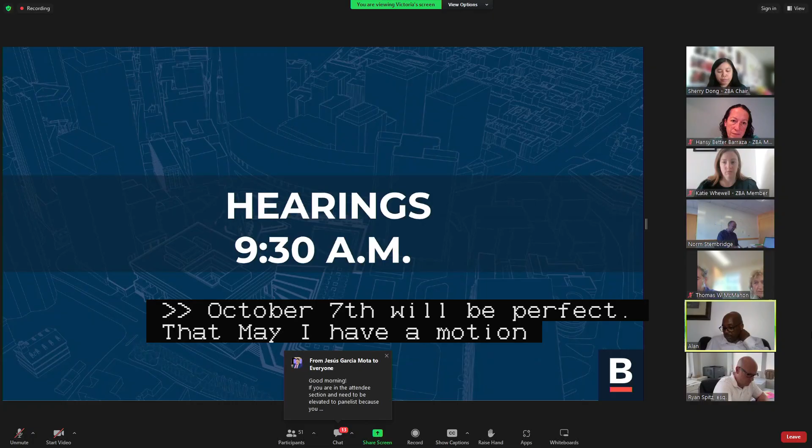We could do October 7th or October 28th. October 7th will be perfect. With that, may I have a motion? A motion to grant the deferral till October the 7th. Is there a second? Second. Mr. Stembridge? Yes. Ms. Whewell? Yes. Mr. Langham? Yes. Ms. Better Barraza? Yes. Chair votes yes, motion carries. See you then. Thank you.

Are there any further requests for withdrawals or deferrals for the 9:30 hearing?

Yes, good morning, I have a request for withdrawal on 2 cases. Good morning, Madam Chair, members of the board. Luis Santana, HS Construction Consulting Services. Address is 46 and 48 Fayette Street.

So those two are, the first is case BOA 1737368 with the address of 46 Fayette Street. Also, we have case BOA 1737366 with the address of 48 Fayette Street.

Would you please explain to the board what you're requesting? As indicated in the letter that we submitted to the board, the owner, after extensive community outreach, decided not to continue with the cases and with the addition. We will only be performing interior renovations to the building in the near future.

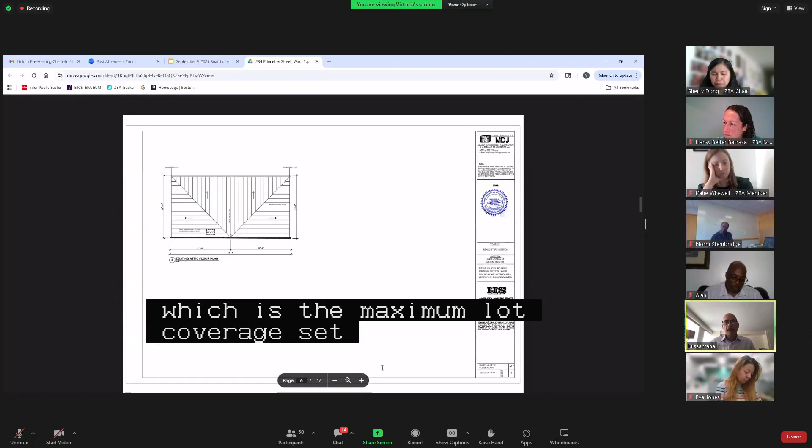We have one zoning violation, which is the maximum lot coverage set at 60% in that particular area, and we will be exceeding that by about 20%, or 256 square feet. All other zoning parameters are in compliance, including all the setbacks. One of the parameters, the minimum permeable area, is existing non-conforming, and we will be increasing that by removing the existing concrete rear yard.

Those were the existing plans. If you move forward, those are the existing elevations. This addition in the rear is not visible from the public way whatsoever. As you can see, the first floor from that elevation is not affected. We are just doing the second and third.

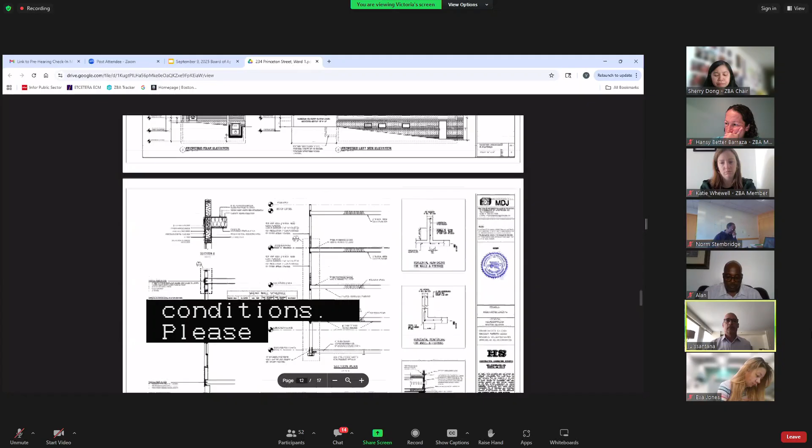If you can please move over to the floor plans, proposed conditions. So again, the second floor unit consists of one single bedroom. We will be adding a bedroom at the rear with a bathroom. The third floor has 2 bedrooms presently; it will become a 3-bedroom unit.

The first floor unit, which has 1 bedroom, will become a 3-bedroom unit by adding 2 additional bedrooms in the basement. We will be relocating some utilities, and we will comply with all the means of egress required for the bedrooms on the lower level. With that, I conclude my presentation. If you have any questions, I will be happy to answer them.

Thank you. Are there questions from the board? Hearing none, may I have public testimony?

Hello, Madam Chair, members of the board, my name is Eva Jones, representing the Mayor's Office of Neighborhood Services. Regarding 234 Princeton Street, our office defers to the board's judgment on this matter. A community process was conducted, including an abutters meeting held on May 12th of this year that was very lightly attended by community members, and no feedback or concerns were expressed. The applicant was connected with the Eagle Hill Neighborhood Association, and they are in communication. At this time, the Mayor's Office of Neighborhood Services defers to the board's judgment on this matter. Thank you for your time and consideration, everyone.

Madam Chair, there are no additional comments. Okay, with that, may I have a motion?

Motion Chair, to approve. Is there a second? Barraza, second. Mr. Stembridge, yes. Ms. Whewell, yes. Mr. Langham, yes. Ms. Better Barraza, yes. Chair votes yes, the motion carries. Good luck. Thank you.

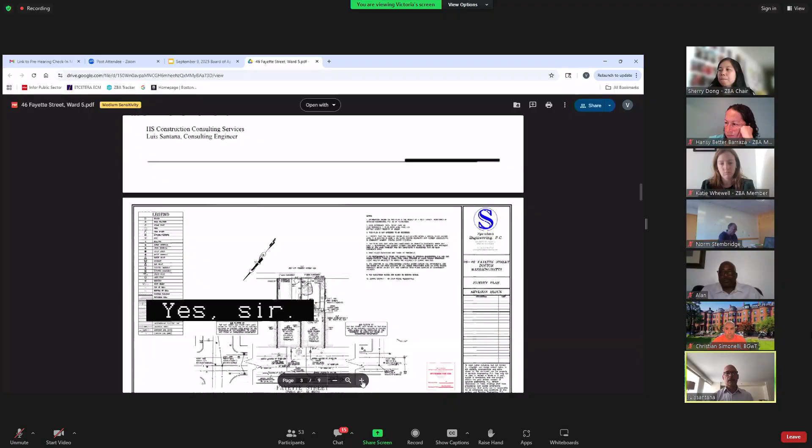Thank you. The applicant and or their representative present, will they please explain to the board? Yes, good morning. This is the case that I previously indicated we will be withdrawing, and the board just had a motion to approve the GCOD only and extract all the other variances from this request. I will be happy to elaborate on both of them.

We do have the no harm letter and Boston Water and Sewer approval for the GCOD component of this case. Mr. Simonelli, can you confirm? Yes, Madam Chair. Good morning, members of the board. Christian Simonelli, Boston Groundwater Trust. We have both Boston Water and Sewer approval letters and no harm letters for 46 and 48 Fayette Street.

Great, thank you. Thank you. So if there is any public testimony, please limit it to GCOD. We are only addressing GCOD at this time. Is there anyone who'd like to speak?

Madam Chair, we have two hands raised. The first one is Chris Godou, please. You can proceed. Chris, can you? Yeah, hello, can you hear me?

Yes. I am the abutter at 50 Fayette Street, and my question about this GCOD is that we have a problem with the groundwater infiltration system that was designed, and I had hired an attorney and an arborist to discuss whether or not that was a problem. When they withdrew this appeal, there was no indication this would be an issue that was going to be raised. So I would ask for a continuance so that if there's something my attorney thinks is improper and is going to harm the tree in our backyard, I'd like to have further discussion about that. Thank you.

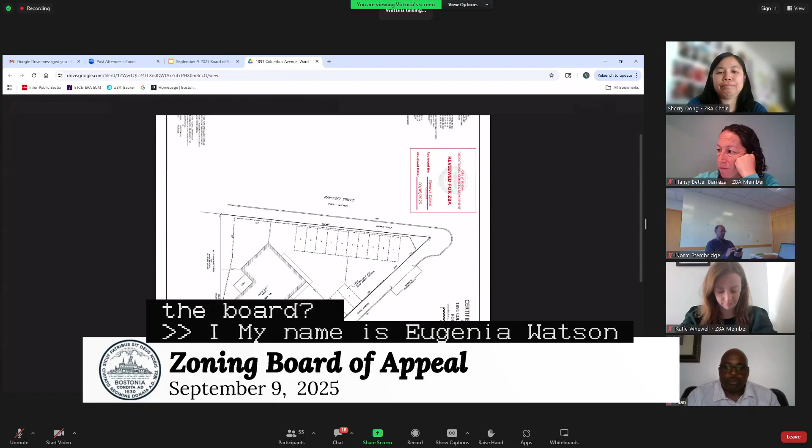Hi, my name is Eugenia Watson. I'm not sure of the protocol, so good morning, Madam Chair and all the other dignitaries. I literally abut 1891 Columbus Ave.

There, ma'am, we're not on that case right now. Oh, okay, that's why I was confused. Thank you. Oh, sorry, we're not on the comments right now. So is the applicant available?

Is the applicant present? I don't see anyone for IAO Auto Repair. No, I don't see anyone on behalf. Okay, we're gonna keep going then.

Norm, you're on mute. Bear with us, we're having some technical difficulties on this end. No. Okay.

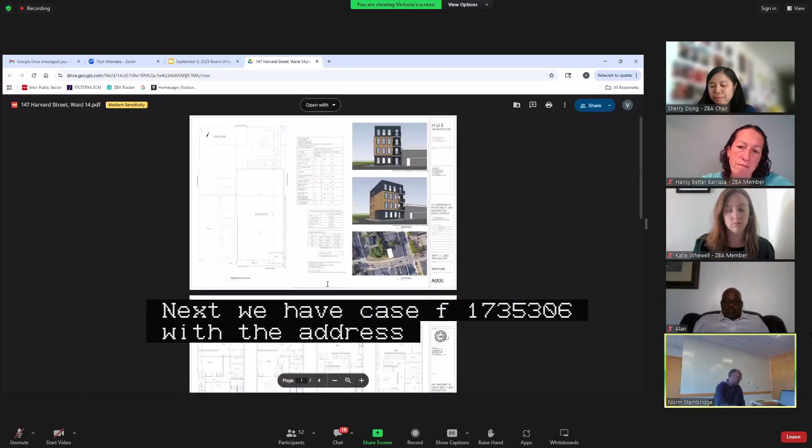Next we have case BOA 1735306, with the address of 147 Harvard Street. If the applicant or their representative for this case is present, would they please explain to the board?

Hi. Michael and Jerome, I don't know if you're for this case. Good morning, sorry about that. Are you for 147 Harvard Street? Yes, my name is Michael Van Dam.

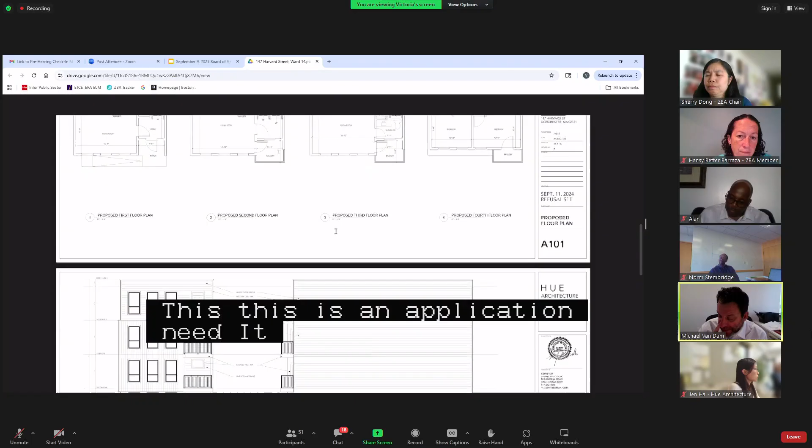I am an attorney for the applicant, and I'm here, but I'll pass the torch to Jennifer Ha, who's the architect on this application. But I will start out before handing it over to her. This application needs to go to the ZBA based on some Article 65, Section 9 issues with lot area and other things, front and setback and height that are stated in the letter on May 8th. So I'll turn it over to Ms. Ha.

Hello, Madam Chair and the board. My name is Jennifer Ha, principal architect at Hue Architecture, located at 53H Harvard Street in Dorchester. I'm actually just down the street from this project I'll be presenting tonight, which is 147 Harvard Street. If you go to the first page, this is a locus map of the site showing that the project is a 5-minute walk from Fairmount Commuter Rail, Talbot Ave Station.

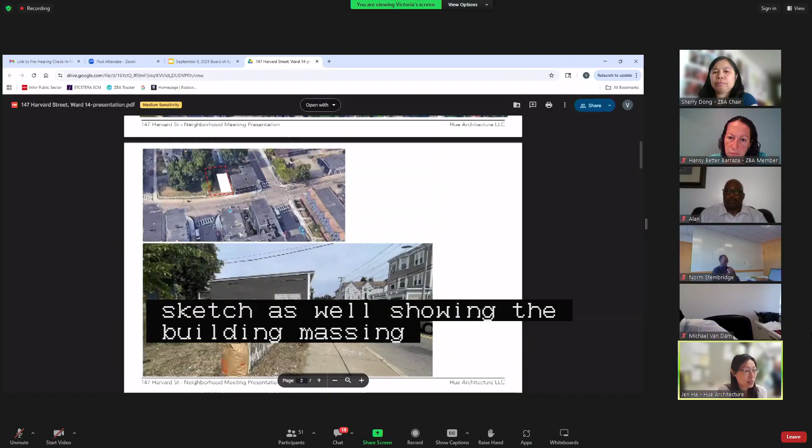On the next page, we have an aerial sketch showing the building massing, which fits in scale compared to the neighboring buildings.

The site is 3,565 square feet, measuring around 47 feet by 75 feet. It is a 3F-5000 zone. It abuts a church to the east, a vacant city lot to the west, and a 3-family to its rear. Across the street are some triple deckers and commercial mixed-use buildings.

The proposal is to build a new 4-unit dwelling with 4 on-grade parking spaces. The building is 4 stories with large windows and balconies facing Harvard Street. Here is the proposed driveway, with 2 parking spaces along the side of the building and 2 in the rear. The next page is a certified plot plan done by the surveyor. We don't anticipate needing to remove any existing trees on the lot for the project.

On the next page are the variances we are asking for. I think Michael can walk through these, but let's go to the design first.

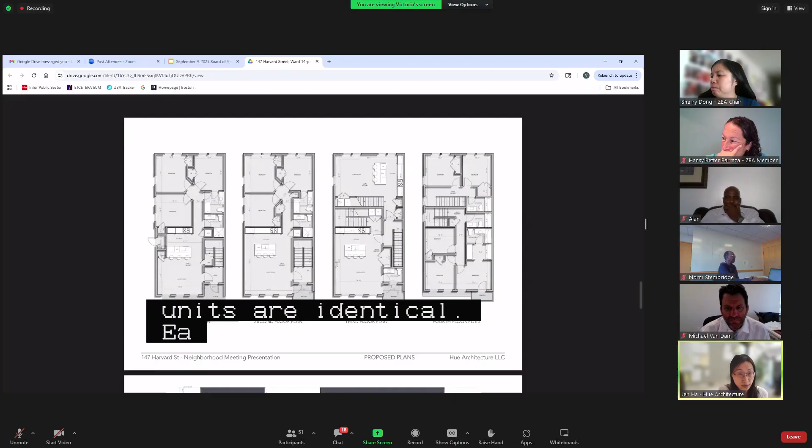Page 9, okay yes. The first floor and second floor units are identical. Each unit will host 3 bedrooms and 2 bathrooms and an open kitchen, dining, living space. The third and fourth floors will host bi-level units, one unit with 2 bedrooms and 1 bathroom, and the other with 3 bedrooms and 2.5 bathrooms. There is no proposed basement for the project. The 3-bedroom units range from 1,000 to 1,200 square feet, and the 2-bedroom unit is 914 square feet.

The facade is a modern design with a combination of dark gray and wood tones. We are specifying wood painted polyash siding along with gray Hardie lap siding and painted steel balcony railings.

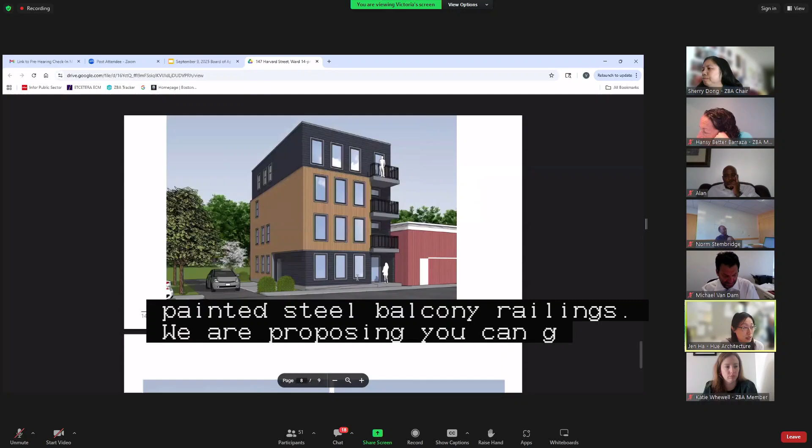We are proposing landscaping and plantings in the front and side of the building to buffer the parking. We designed private front balconies for 3 of the 4 units facing Harvard Street. We think the beautiful large windows facing Harvard Street offer an attractive and desirable neighborhood appeal towards the commercial street. That is the end of the presentation.

Thank you. Are there any questions from the board? Hearing none, may I have public testimony?

Madam Chair and members of the board, for the record, my name is Jeremy Bembury, the Dorchester Community Engagement Specialist for the Office of Neighborhood Services. The applicant has completed the community process, which consisted of an abutters meeting facilitated on July 8th, where one abutter voiced concerns regarding the proposed height of the project, while others' inquiries were addressed. Following the abutters meeting, no further community process was required, and to date our office has not received any letters of opposition or support. Thank you for your time, and the Mayor's Office of Neighborhood Services would like to defer to the board for their judgment.

Thank you. Madam Chair, there are no additional comments. With that, may I have a motion?

Madam Chair, I'll put forward a motion of approval with BPDA design review to look at the site planning. Is there a second? Second. Mr. Stembridge, Yes. Ms. Whewell, Yes. Mr. Langham, Yes. Ms. Better Barraza, Yes. Chair votes yes, the motion carries.

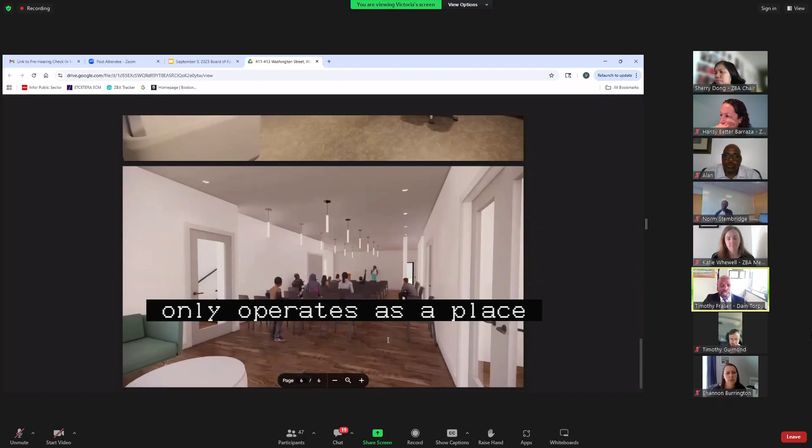This appeal involves property at 411 to 413 Washington Street in Dorchester, in the Four Corners neighborhood. The church has owned this building since 1992, which not only operates as a place of worship but also is the site out of which operates the Ella J. Baker House, a faith-based organization that works with at-risk youth in the community on violence reduction and academic programming.

In 2007, a fire did extensive damage to the building. However, the church continued to provide that youth programming on a reduced basis as conditions allowed in the remaining portion of the building. But now the church is seeking to completely renovate the building into a place of worship and add state-of-the-art elements where they'll continue to operate the mission of the Ella J. Baker House. In addition to the services provided to date, the new building includes a high-tech music studio and a cutting-edge computer center and other modern improvements to attract the youth and continue the work of this organization for the community.

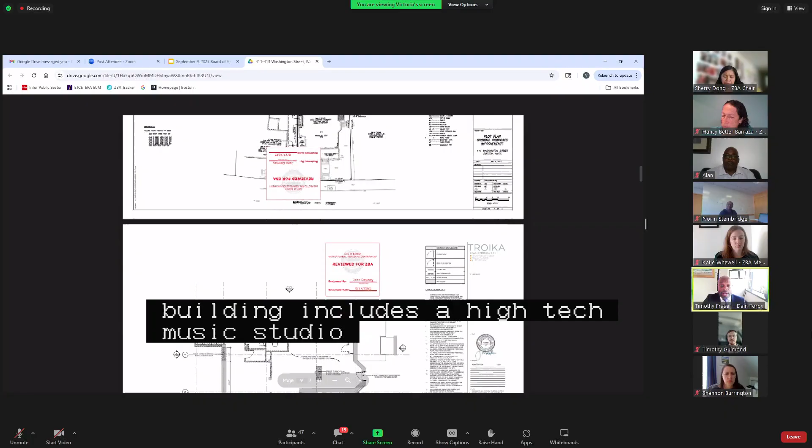The project does give rise to 4 variances. The first is height. We're in a 2F 5,000 zoning district where the maximum height is 2.5 stories. The existing building is 3 stories, and the project doesn't propose to add any additional stories, but we do require a variance for that historical code violation.

There's also a side yard setback violation. The side yard setback is 10 feet. The existing building is already right on the property line, not uncharacteristic for this neighborhood. So our project does require a variance for that historical code violation.

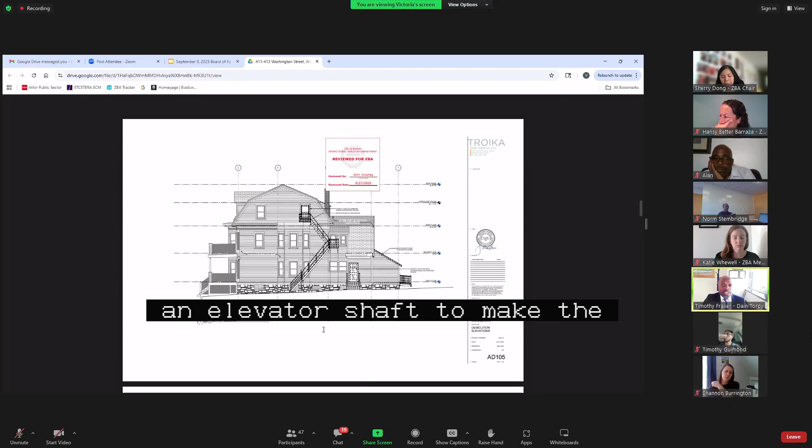With regard to the rear yard setback violation, we're proposing to add, as you can see in that picture on the right, a small addition to accommodate an elevator shaft to make the building ADA compliant, which currently it's not. Looking at the shape of the lot, and there's a plot plan signed here, you'll see that the rear yard violation would be measured from that closest piece to the rear of the building. We have almost 80 feet to the actual rear yard line, but because of the shape of this lot, the rear yard is calculated and we're at 21 feet. We require 30.

And then the next violation, you'll see that there are two parking spaces to the rear of the building. They're two ADA compliant parking spaces, and then there'll be an additional space for a staff member or on Sunday the pastor.

That rear lot is actually accessed by way of an easement on the next door property, and that's what triggers that violation. The easement is deeded and perpetual, but we do need a variance to approve the continued use of that easement to access those two parking spaces in the rear.

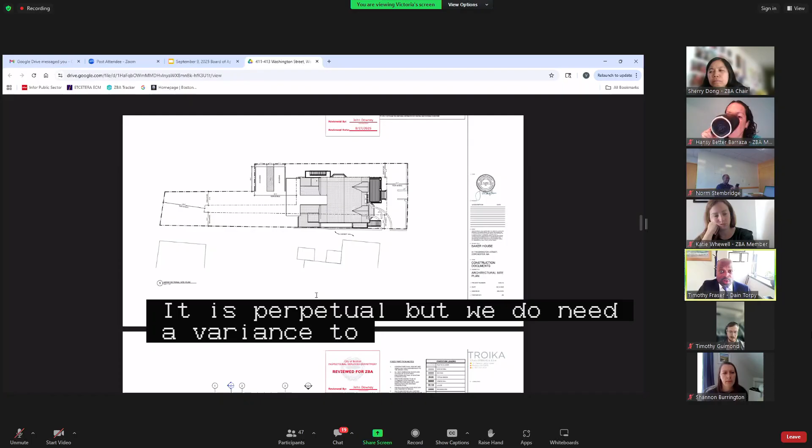And then finally, there's an FAR violation again, which is not uncharacteristic for a project of this type in this neighborhood. The applicant conducted a robust community process in conjunction with the Mayor's Office of Neighborhood Services to communicate the project to the community and other stakeholders.

Specifically, in April 2023, we presented the project to the Greater Chamberlain Neighborhood Association, and I believe there's a support letter on file from Greater Chamberlain. And then in May, we held an abutters meeting as well as met with the United Neighborhood Association, and I believe there's a letter of support on file from United Neighborhood Association as well.

The Office of Neighborhood Services then determined that those meetings sufficed as the required community engagement. So we're here today before the board to request that the aforementioned variances be granted. That concludes my presentation, but I want to make Shannon Burrington of Studio Troika available to answer any questions about the project design and technical specifications.

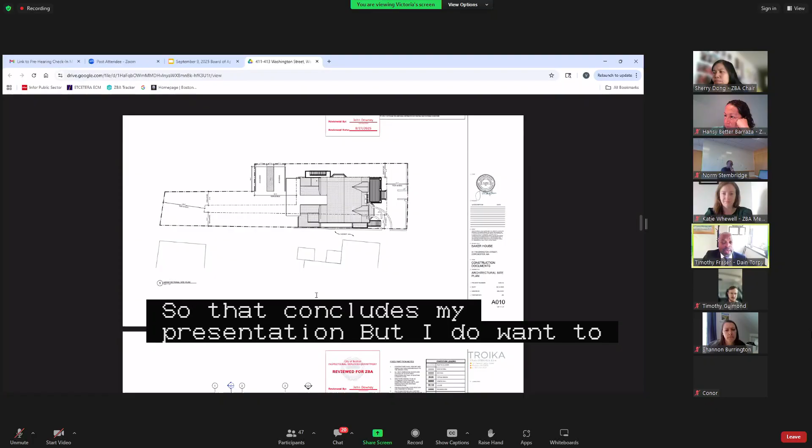And as I stated, Dr. Rivers is also on the line to answer any questions about the programming or services provided. So with that, I will take questions from the board. Thank you. Are there questions from the board? Hearing none, may I have public testimony?

Madam Chair and members of the board, for the record, my name is Jeremy Bembury. I am the Dorchester Community Engagement Specialist for the Office of Neighborhood Services. The applicant has completed the community process, which consisted of an abutters meeting facilitated on May 13th with two abutters in attendance. A few inquiries were made regarding the community's ability to use the facility and were addressed during the meeting. No concerns or opposition were raised during the meeting.

Next, the proposal was presented to United Neighbors Association and Greater Chamberlain Neighborhood Association. The proposal was well received by both civics, and with no concern or opposition was approved to move forward. To date, two letters of support were mentioned but were not received by our office at this time, to my knowledge, although they may have been sent directly to the zoning board. Thank you for your time, and the Mayor's Office of Neighborhood Services would like to defer to the board for their judgment.

Mr. Bembury, quick question—just a comment and a question. We did not receive those two letters that were mentioned, but we did receive one from Mount Bowdoin Betterment Association and Four Corners Neighborhood Association. Is that an abutter to this project? I am not aware that those two associations are abutters. I am only aware of the United Neighbors Association and Greater Chamberlain Neighborhood Association. I can take a look to see if they are the required or requested civic.

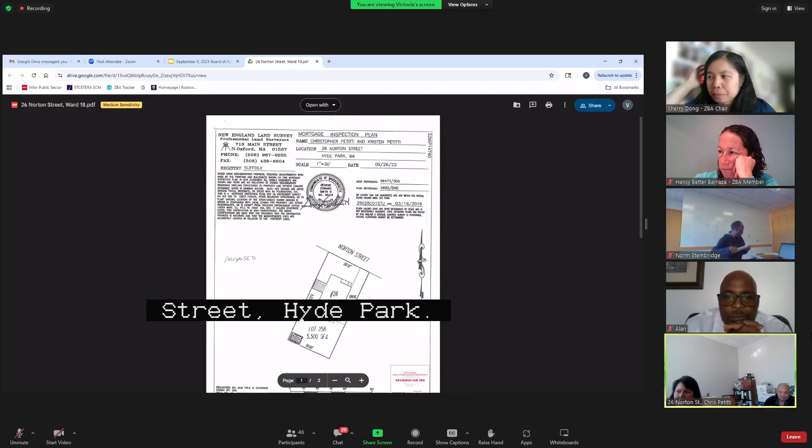Good morning, members of the board. My name is Michelle Bulger. I am here representing Chris Petitti, homeowner of 26 Norton Street, Hyde Park. Mr. Petitti is here with me. Chris purchased his home and pre-existing sheds at 26 Norton in October of 2022. The two sheds on his property appear on his home inspection report. After buying the property, he found that the sheds were built too close to his property line. He has been working with ISD and now seeks consideration from this board. The two sheds are small and are in keeping with his neighborhood.

There is no opposition to his request that we are aware of. Mr. Petitti asks that the board issue a variance with respect to the setback requirements and allow his sheds to stand nearer than 4 feet to his lot line. He is further asking that the board waive the requirement for a certified plot plan and accept the certified New England Land Survey plan and the revised plan provided, which contain his sheds, and allow ISD to use these drawings to have the sheds plotted or added to its property. Should the board allow this request, we will recommend that the civil action filed against him concerning the two sheds in the Boston Housing Court be dismissed, and we will follow through with ISD following this hearing with the board's decision. Thank you for your consideration.

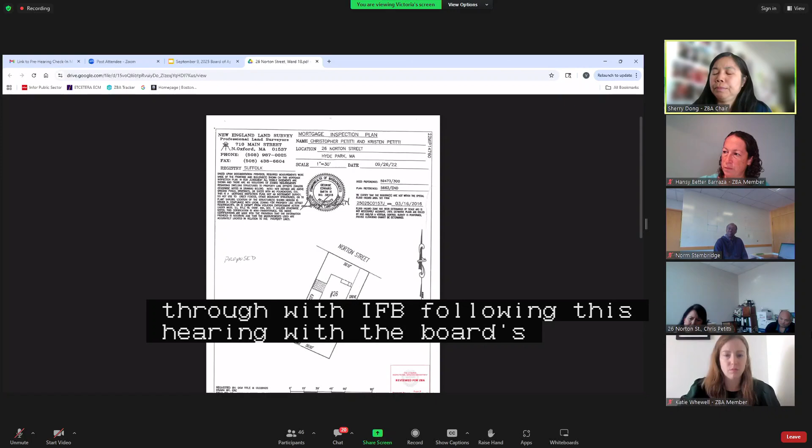Okay, are there questions from the board? I would just ask why they have not engaged a surveyor.

The mortgage inspection plan was certified, and the sheds were easily drawn to the plan, and it would be a financial burden on the homeowner to have another survey, and we would argue unnecessary. It was the cheapest way around. It was a $3,500 survey, which could have been a little bit more than that. So it was looking around $5,000 to have that accomplished. So we were trying to avoid that.

Okay, it's just unclear to me whether we have the authority to waive required documents to allow the land survey plan. I believe we were told at ISD that even ISD has that authority. If the board doesn't have the authority, ISD has the authority. They provided us with a memo granting them that authority to waive that part of it. So I don't think we need that from the board. What they were unable to waive in their planning department was the setback, technically, I think.

Okay, right. Okay, I thought I just heard you say you needed authority from us to waive. I did ask that, so I shouldn't have, because no worries, Mandy's already comfortable with that. Okay, thank you. Any other questions?

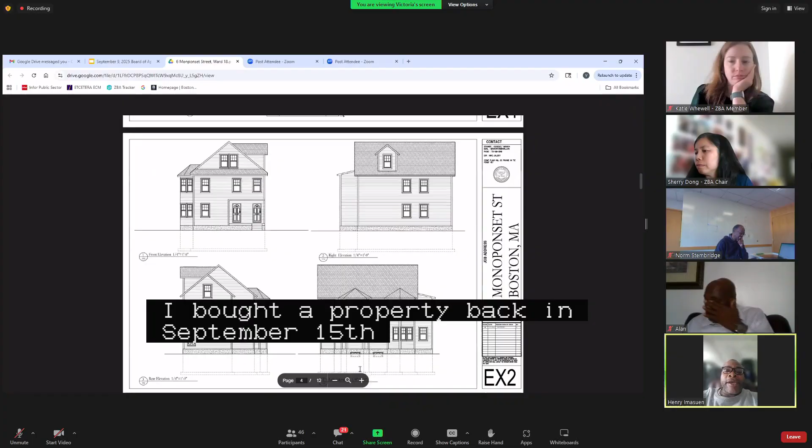Yes, I'm here to present. Good morning, board. My name is Henry Imasuen. I'm the owner of 6 Monoponset Street. I bought the property back on September 15th, 2024. It was sold to me as a 2-family. When I tried to get a permit to renovate it because the property was extensively dilapidated, I noticed the attic was finished like an apartment, and so was the basement. So when I went to get a permit to fix it, I found out that it was actually a 3-family.

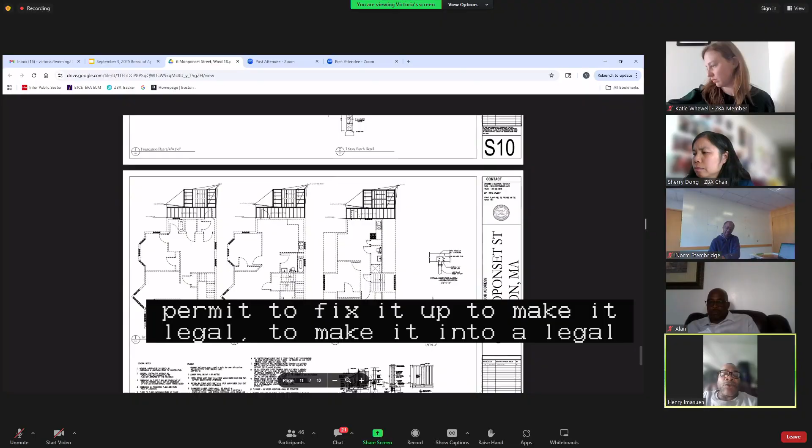It was approved for a 3-family back on March 15th, 1946. Even though it was sold to me as a 2-family, I discovered it was a 3-family. I decided to get a permit to fix it up, to make it legal, to make it into a legal 4-family. The basement was also partially finished. When I applied for the permit, they said because of the setbacks, to make it a 4-family, it was denied, and that I have to go in front of the zoning board.

I have completed a site survey. Boston Survey did the survey. There's a huge garage behind the building that I'm going to be bringing down to create more room for parking, so all the apartments are going to have parking in the backyard and on the side of the building. So that's why I'm here. I already submitted the documents from the architect that redesigned the interior.

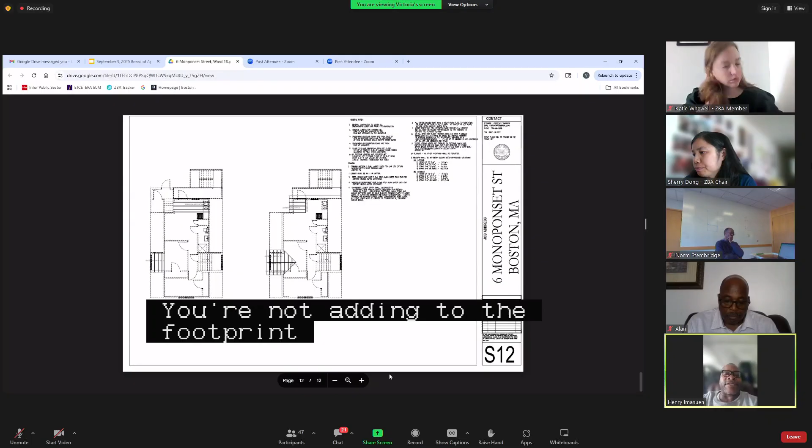So I'm just hoping that you guys approve it for me so I can start my renovation. Thank you. So just to confirm, your renovations are interior only, you're not adding to the footprint? No, I'm not adding to the footprint, but the exterior of the house is extensively dilapidated. I'm going to put the deck, it has to be redone on all floors, and then vinyl siding and the roofing all has to be done. Thank you. Questions from the board?

Hearing none, may I have public testimony? Madam Chair and members of the board, for the record, my name is Jeremy Bembury. I am the Hyde Park Community Engagement Specialist for the Office of Neighborhood Services. The applicant has completed the community process, which consisted of a well-attended abutters meeting held on May 12th, with congestion and parking concerns voiced multiple times. Abutters felt that the already congested neighborhood would be overwhelmed with the additional units and requested they provide off-street parking instead. Other concerns were for the upkeep of the property and whether it would become a rooming house. One abutter did state he would like to not see it become a rooming house in the future. Following the abutters meeting, on June 11th the proposal was presented to Edgewater Neighborhood Association, where they voted neutral on the proposal and approved to move forward. Thank you for your time, and the Mayor's Office of Neighborhood Services would like to defer to the board for their judgment. Thank you, Madam Chair, there are no additional comments.

Okay, any other questions from the board? Hearing none, may I have a motion? Madam Chair, I'd like to put forward a motion of approval.

Is there a second? Second. Mr. Stembridge, yes. Ms. Whewell, yes. Mr. Langham? Mr. Langham? He appears to be frozen. Mr. Langham, if you can hear me, you might want to turn off your video. Okay, Mr. Langham, we need a vote from you. Yes. Thank you. Mr. Stembridge, sorry, Ms. Baraza. Yes. Chair votes yes, the motion carries. Good luck.

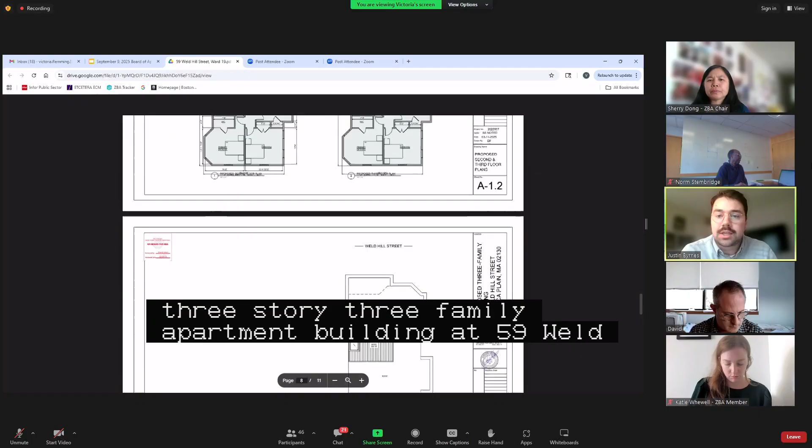Each of the 3 units in this new construction would be a 3-bed, 2-bathroom unit with an average unit size of just under 1,200 square feet. 2 parking spaces would be provided in the rear of the lot for residents. And I also want to add that this would be an owner-occupied building as Mr. Chaitin intends to reside in one of the units.

The proponent sees this as an opportunity to bring additional housing to the area by utilizing an underused and rather overgrown lot. The 3-family use is not only zoning compliant, but well within the context of this area, as over 70% of the structures on the street are 3-family dwellings.

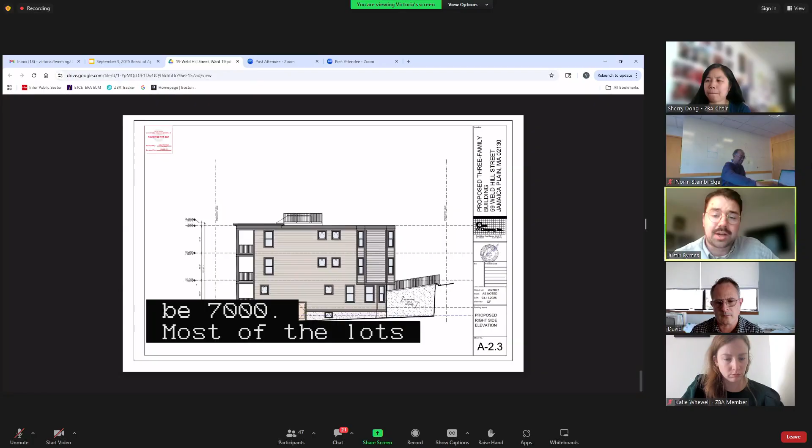Our small lot size, which we see as the root cause for most of our violations, is also within context in the surrounding neighborhood. Though the required lot area for a 3-family in the sub-district would be 7,000 square feet, most of the lots on Weld Hill barely even have half of that amount of lot space. In fact, per our research, all but one of the properties on Weld Hill Street would have an FAR violation if they were to be built as new constructions under the current code. So we feel that despite the number of violations incurred, our proposal is perfectly in line with what exists in the neighborhood. And I would also note that the BPDA recommendation feels the same.

A quick note on our community process. This underwent a full, robust community process with an abutters meeting and a meeting with the JPNC, who I believe filed a letter of support with the board. And with that, I will turn it over to David Freed to quickly run through the plans, and I'm happy to answer any questions afterwards. Thank you.

Thank you very much, Justin. Madam Chair and members of the board, my name is David Freed, and I'm an architect at Chu & Company, address of 1 Billings Road, Quincy, Massachusetts, 02171. If you could go back to the 2 pages to the front elevation, please. I'm sorry, just go back to the plans, to the first floor plan and the second floor plan, A11. Thank you so much.

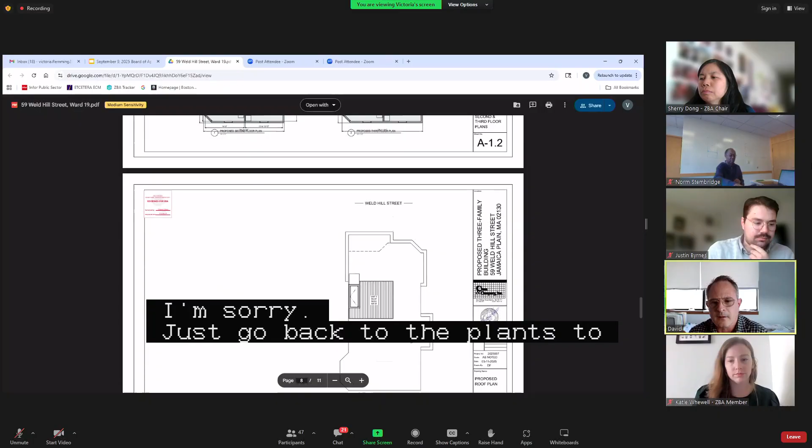Justin already elaborated about the setbacks and our zoning violations. I'll just quickly take you through the plans. We have an owner-occupied 3-family that's 3 bedrooms, 2 baths. We organized the living space so that it fronted the street and the corner, and we set the bedrooms in the back. If we go to the next plan, please. When we go to the second and third floors, the units get a little larger at 1,200 square feet each. And if you could please move it to sheet A21.

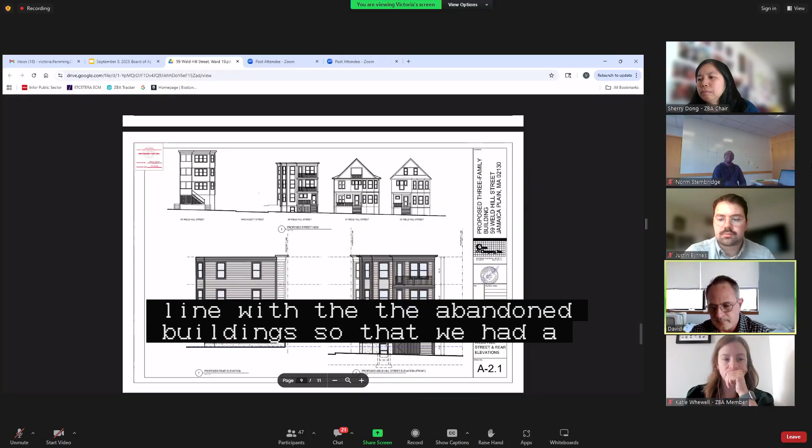We raised the building so that our first floor was in line with the abutting buildings, so that we had the same relationship, and to facilitate handicap access to the first floor unit, as it's a group 1 unit. We have a lift that is incorporated into the first floor deck.

Because this is a building that's on a corner, we tried to address the other front on Wachusett as a front rather than as a side. We also conceived of this as a three-family with a flat roof, so as to bookend Wachusett on each end, as there's an existing three-family on the opposite side of Wachusett.

This is the side elevation as seen from the abutting house number 57, and we have a small rear yard. We'll have a couple of parking spaces.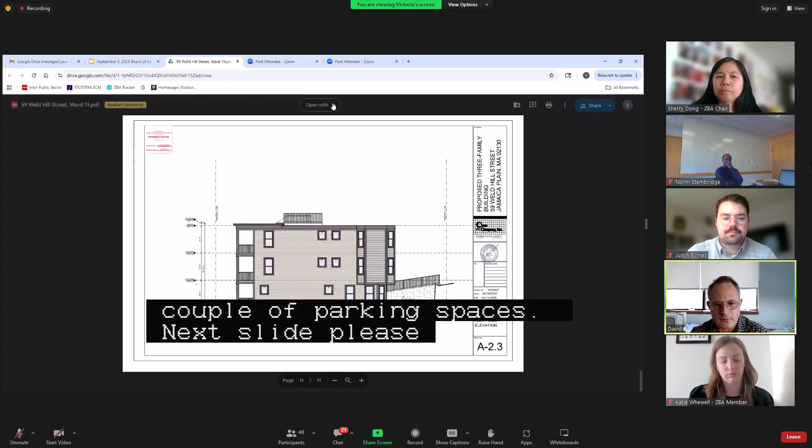And that may be the end of the presentation. Thank you. Are there questions from the board? I have one question.

I have one question regarding the Google Images. I see this really beautiful, large oak tree, but I'm not seeing that on your survey plot plan. Is that oak tree on your property?

Yes, the oak tree. Sorry, David, if you want to speak. I was just going to ask them to call up the plot plan. I think it is shown on the plot plan. Yeah, I believe so as well. Yeah, you can go back to see. Yes, it's on our property. Can you zoom in on that, showing me where it is? Okay, but it's showing it as if it's built into the garage. It's growing out of the garage and the retaining wall. Okay.

It looks like a very large, healthy tree from the image. Are you going to be removing that tree?

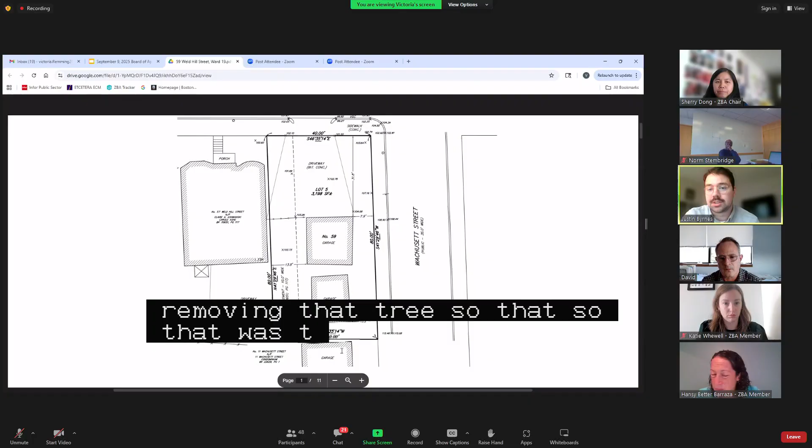So that was the initial plan, and the community raised similar concerns about the oak tree. Many members on Weld Hill Street have a great appreciation for the tree, and so does the proponent. We are more than happy to work with BPDA design review, should we be approved, to look for solutions to maintain the tree. As David said, it's currently growing into one of those garage structures in the rear, and its roots have grown through the wall and it's sort of leaning on it for support. But we're more than happy to explore options through design review to try to keep it, because we have heard extensively the community's wanting to preserve the tree. So we definitely are open to any solutions to try to keep it.

Okay, that sounds good. Just because these trees around these neighborhoods are over 100 years old, so sounds good. Thank you.

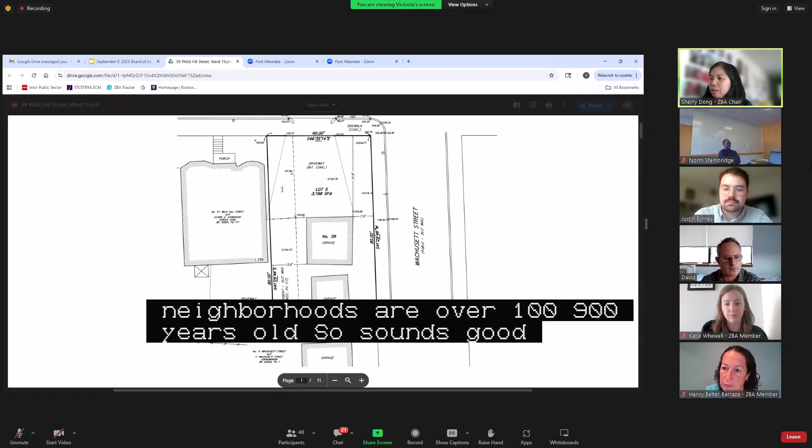Okay, thank you. Any other questions or comments from the board? May I have public testimony?

Madam Chair and members of the board, for the record, my name is Jeremy Bembury. I'm the Jamaica Plain Community Engagement Specialist of the Office of Neighborhood Services. The applicant has completed the community process, which consisted of an abutters meeting facilitated on June 23rd, with many abutters voicing concern for maintaining the trees on the property and affordability. Abutters agreed they would like to see the large tree on the property remain, as well as an affordable unit to address affordability, as the city is in need of affordable housing.

An inquiry on properties with similar violations was also addressed during the meeting. On July 16th, the proposal was presented to the Jamaica Plain Neighborhood Council Zoning Committee, where they voted to approve and support the proposal under the condition of a design review. To date, our office has been informed of a support letter, but it has not been received at this time and may have been sent to the zoning board directly. Thank you for your time, and the Mayor's Office of Neighborhood Services would like to defer to the board for their judgment.

Thank you. Madam Chair, there are no additional comments. Okay.

With that, is there a motion? Madam Chair, I'd like to put forward a motion of approval with a proviso that the project undergoes BPDA design review, paying special attention to the preservation of that large tree at the rear, and also site plan review to address some of the concerns in the recommendation as it relates to side yard on Wachusett and the open space to replace the proposed parking. Is there a second? Second. Mr. Stembridge?

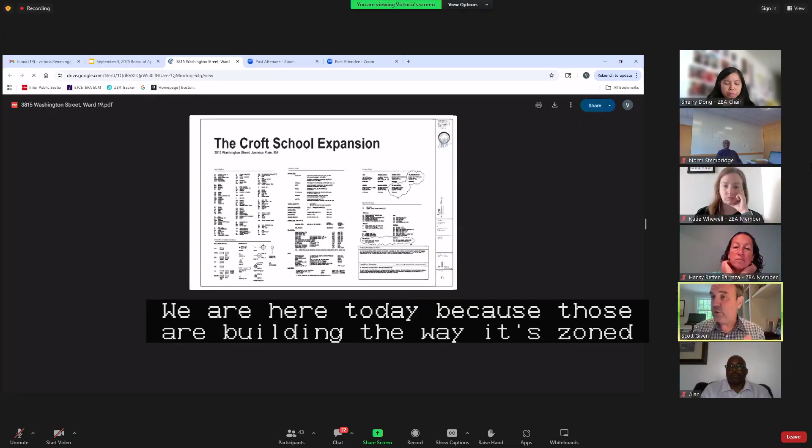We are here today because our building, the way it's zoned, has school as a conditional use above the first floor. If you want to go to page 7 on the slides, that would make sense. I think I can talk over this, and if there are specific questions about the design, we can go to those. School is a conditional use above the ground floor. Back in 2021, we sought to change the use on the second floor of the building to allow a school to operate there, and that effort through this same process was successful.

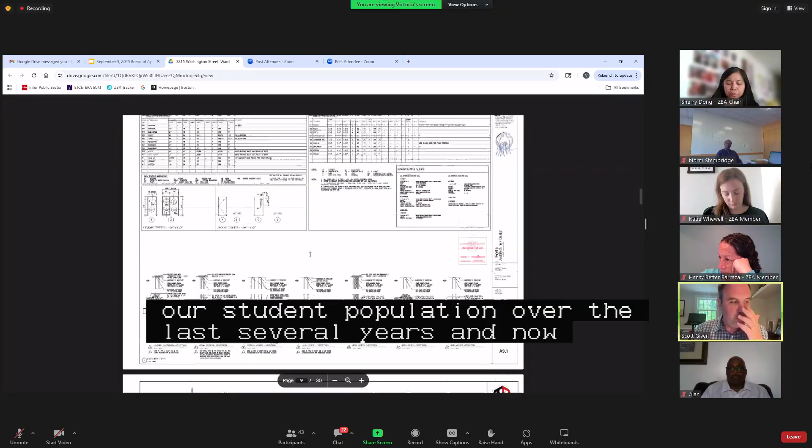So we've continued to expand our student population over the last several years. Now we've worked out an agreement with the building owner to lease space on the third floor of the building as well, where we would put 3 additional classrooms that will allow us to complete the full enrollment of the school in this one building. But we need zoning approval to do so, and I believe the technical term would be we need an extension of non-conforming use, from my understanding.

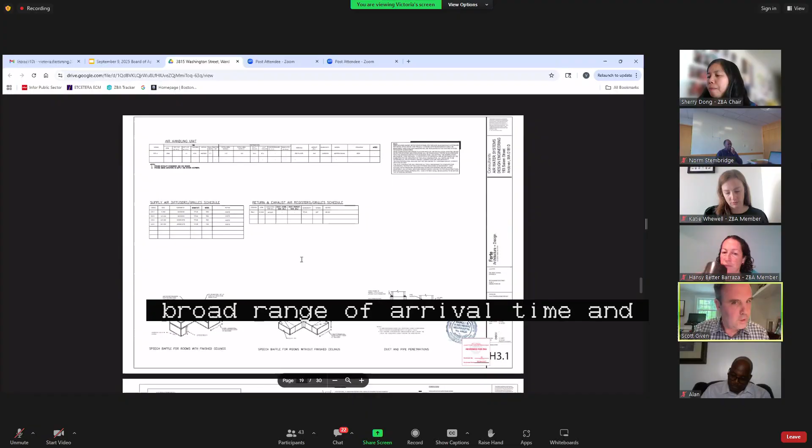Just a couple of quick things. In terms of parking and traffic flow, our teachers use off-site parking. We have a really broad range of arrival time and dismissal time, and very closely managed traffic flows. There's been minimal to zero interruption of traffic in the area, even as we've grown into a 240 student school today. I would say that the school is really beloved by our families and by the neighborhoods that we serve as well. I really appreciate the opportunity to be here. Thank you.

Are there questions from the board? Hearing none, may I have public testimony?

Madam Chair and members of the board, for the record, my name is Jeremy Bembury. I'm the Jamaica Plain Community Engagement Specialist for the Office of Neighborhood Services. The applicant has completed the community process, which consisted of an abutters meeting facilitated on June 26th, with one abutter in attendance who spoke very highly of the proposal, the proponent, and the school, for how helpful and loved they are in the neighborhood. On July 16th, the Jamaica Plain Neighborhood Council Zoning Committee voted to approve this project as well. To date, our office has not received any letters of opposition or support. Thank you for your time, and the Mayor's Office of Neighborhood Services would like to defer to the board for their judgment.

Okay, Mina. Thank you. Good morning, Madam Chair, members of the board. This is Mina Perez, Executive Director for the Carpenters Labor Management Program. First, we want to say kudos to the proponent for the great mission and the great work being done with this organization. It is greatly appreciated by our hundreds of members that live and work in the city of Boston. We simply want to remind them about the importance of hiring responsible contractors to perform any work. Thank you so much, we're in favor of it.

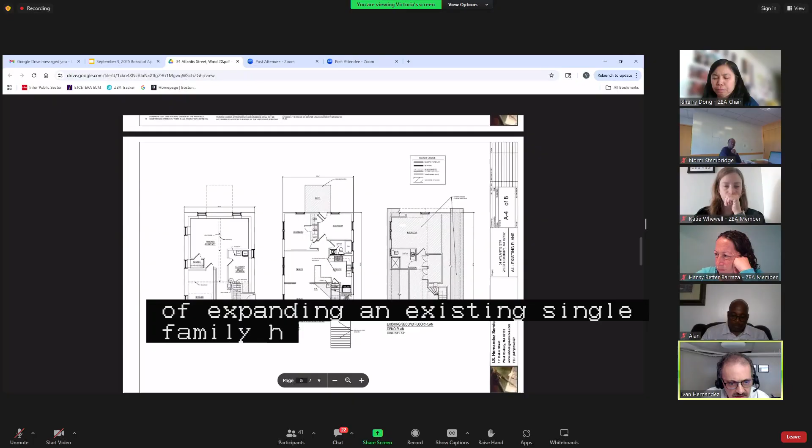We're adding this here shows the existing floor plans of the house. It basically consists of a basement area with a small first floor footprint, and then a half-story attic space above that's currently finished. If you go on to the next page, you'll see the existing elevations of the house and what it currently looks like. On the upper left side you have the front, right side on the right, and then rear elevation on the lower left, and the left elevation on the bottom right.

If you go on to the next page, you'll see the proposed floor plans. As I said, the house is being expanded upwards, so there is no change in the footprint of the basement, with the exception that we are extending the foyer entry space forward by 4 feet. So the first plan on the left is the basement plan. We are also doing a minor expansion of the existing garage.

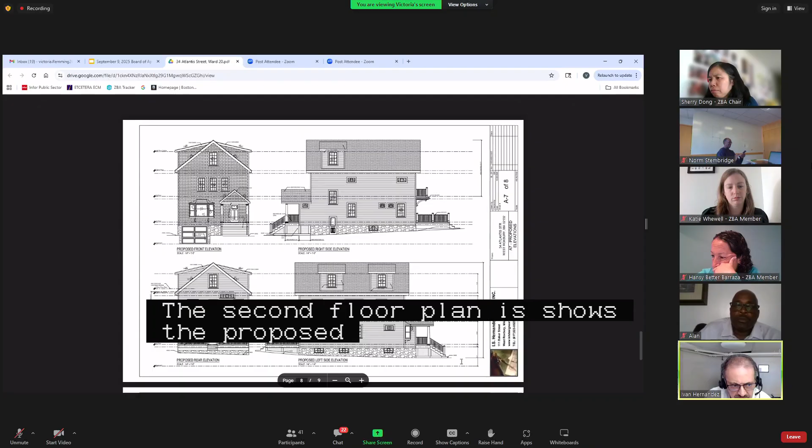The second floor plan shows the proposed second level and then upper level. This here shows you the front elevation of the house from the street view, what the proposed house would look like. The side elevations and the rear elevations—there are very similar properties on the street and in the area that are very similar to the house. That's pretty much the scope of the proposed work.

Thank you. Are there questions from the board? Hearing none, may I have public testimony?

Good morning, Madam Chair and board members. Siggy Johnson with the Mayor's Office of Neighborhood Services. This petitioner completed the ONS community process. Our office hosted an abutters meeting on June 25th, at which no concerns were raised. The petitioner presented to the West Roxbury Neighborhood Council, which voted to support the application. With that background, our office defers to the judgment of the board. Thank you.

Madam Chair, there are no additional comments. Okay, with that, may I have a motion? I'd like to make a motion to approve. Is there a second? Second. Mr. Stembridge, yes. Ms. Whewell, yes. Mr. Langham, yes. Ms. Better Barraza, yes. Chair votes yes, the motion carries. Good luck. Thank you. Thank you very much.

Next, we have case BOA 1729343 with the address of 82 Oakland Street. The applicant and or the representative present, please explain to the board.

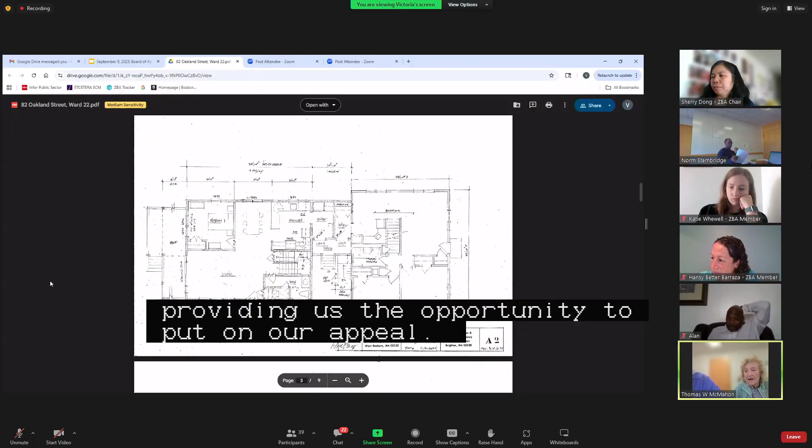Yes, good morning, Madam Chair and members of the board. My name is Thomas McMahon. I'm here with my mother, Vera McMahon, who is the property owner at 82 Oakland Street. Thank you very much for providing us the opportunity to put on our appeal. We are proposing a change of occupancy from single family to a two-family residence, with a new 26 by 42 foot rear addition to serve as the second unit as permitted in the submitted plans.

The modest conversion would allow me to return to Brighton, where I have deep family roots and a long-standing connection to the Brighton community. My goal is to establish a multi-generational living arrangement. I would reside in one unit with my family, and my mother would reside in the other unit. This would allow me to care for her and continue to support one another while staying engaged in and contributing to the neighborhood. I grew up in Brighton, and I continue to work at a local university, and I provide volunteer services in the Brighton community with veterans.

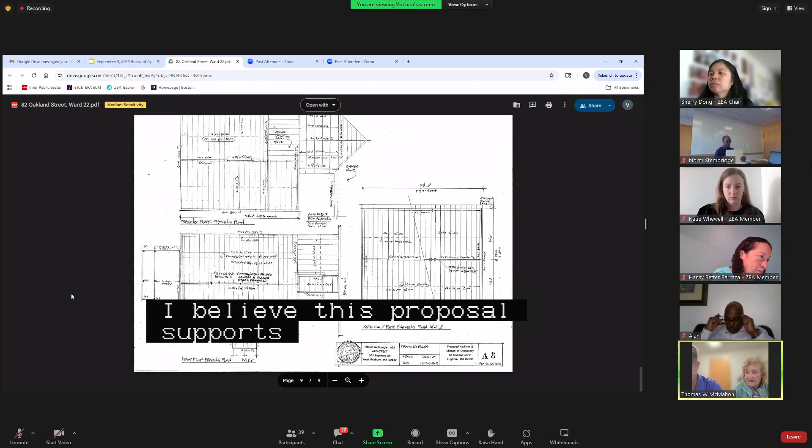The proposed changes will not alter the overall footprint or scale of the existing structure. I'm committed to preserving the architectural character of the home and ensuring the design remains consistent with nearby properties. I believe this proposal supports the city's goals of increasing housing flexibility and keeping families together in Boston. I have also proactively communicated and reached out to my neighbors around the project and gratefully received their support.

While I understand this requested use is not currently allowed as of right, I respectfully ask the board to consider granting us the necessary variance. The proposed use is in keeping with the residential nature of the neighborhood and is consistent with similar multifamily homes in the vicinity.

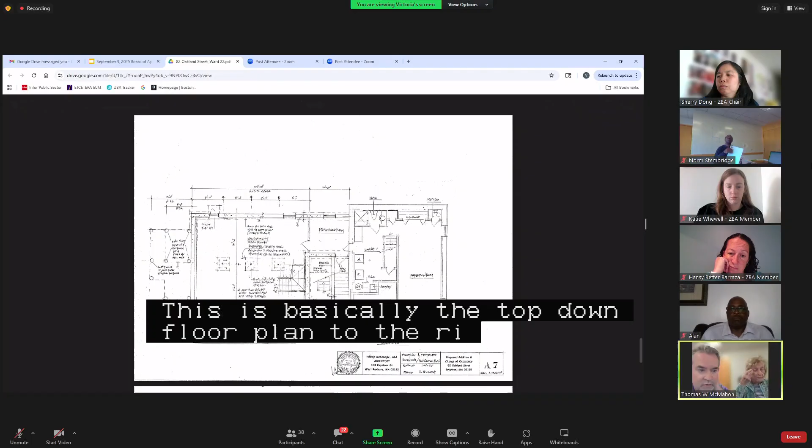So if we want to review the floor plan here, this is the basement, so that's the 26 by 42 foot basement, which is basically going to be for HVAC and mechanical purposes. So we're looking at the new proposed addition there. This is the top-down floor plan. To the right is the existing structure, and to the left would be the proposed addition, the 26 by 42 foot addition, connected by a 10 foot by 12 foot breezeway.

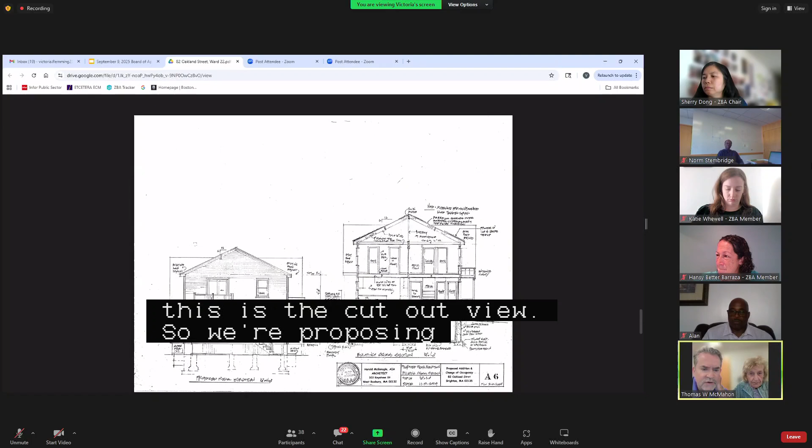On the first floor—I think that's still the basement on the left. Can we go to the next slide, please? Okay, so this would be the south view elevation, looking from the backyard down into the property. On the right-hand side is the cutout view. We're proposing basement, first floor, and second floor, which stays within the same footprint as the existing property. If we go to the next slide.

Okay, this would be the west side elevation of the home. You can see the existing structure is on the left. It would be connected to the new structure by the breezeway. At the very tail end of the property, we're proposing to put a deck on the first floor and the second floor.

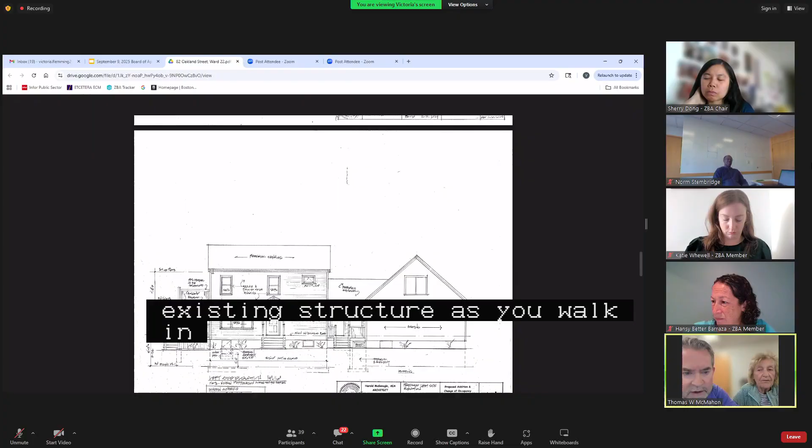Go to the next slide. This would be the east side elevation. On the right-hand side is the existing structure. As you walk into the backyard, there's a driveway in front of the existing structure. As you walk in, you could see the 10 by 12 foot breezeway. The door on the right would be to the existing unit, and the door on the left would be to the new unit. This would be our front entryway here.

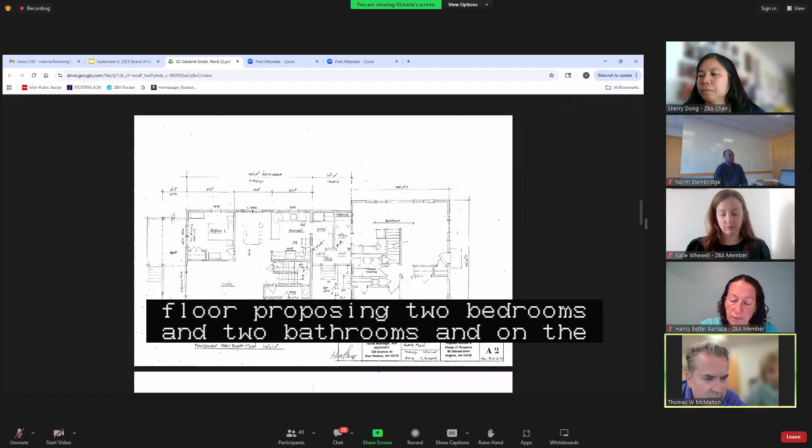Next slide. Okay, this looks like—yep, this looks like the first floor elevation. Let me zoom in a little bit. So, first floor—oh no, this looks like the second floor. On the second floor, we're proposing 2 bedrooms and 2 bathrooms. And on the first floor, we're proposing a kitchen, living room, and a bedroom with a bathroom. So overall we're looking at 3 bedrooms and 3 bathrooms for this particular unit.

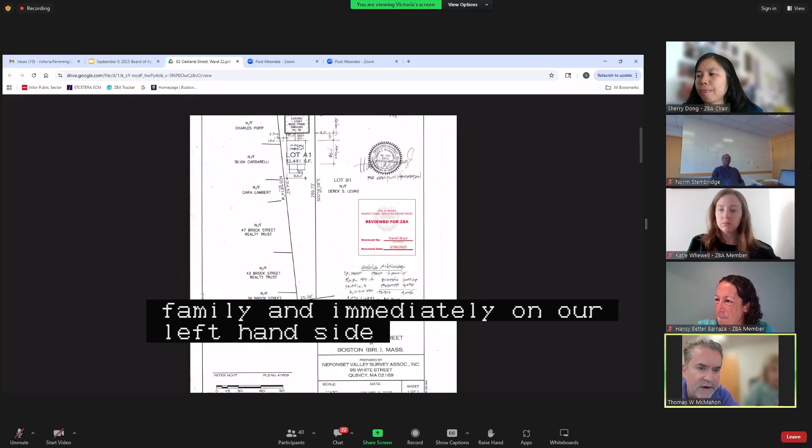So the variances here: the first, Article 51, Section 8, is because the area is zoned as single family, although to the right of us is a 2-family and to the left of us is a 2-family. On our left-hand side, our footprint would be equivalent to the existing property right next door to us. The other variance was for insufficient side yard. We're looking at anywhere from 7 feet 7 inches of clearance on the west side, and almost 10 feet of clearance on the right side.

That finishes my overview. Thank you, sir. Are there questions from the board? Hearing none, may I have public testimony?

Madam Chair and board members, Siggy Johnson with the Mayor's Office of Neighborhood Services. This petitioner completed the ONS community process. Our office hosted an abutters meeting on June 18th, at which multiple abutters were supportive of the proposal. The applicant presented to the Brighton Allston Improvement Association, which voted to support the application. With that background, our office defers judgment to the board. Thank you.

Thank you. There was one person, Annabelle, not sure if you're going to speak. Yeah, Madam Chair, Annabelle Gomes from the Brighton Allston Improvement Association. We'd like to go on record in support of this project. We feel this project is great—it's great being able to support multiple generations of families staying in the neighborhood. Thank you. Thank you. Okay.

There are no additional comments. With that, may I have a motion? We'll make a motion of approval. I think the shape of the lot sort of lends itself to the side yard setback relief, as the additional unit of housing is contextual with the neighborhood. Is there a second? Second. Mr. Stembridge? Yes. Ms. Whewell? Yes. Mr. Langham? Yes. Ms. Better Barraza? Yes. Chair votes yes, the motion carries. Good luck, sir. Thank you very much, board.

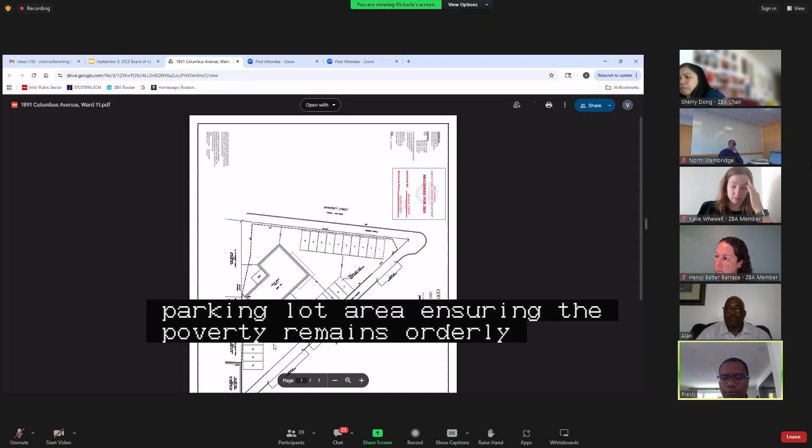I'm here to respectfully request approval to sell vehicles in the parking lot of 1891 Columbus Avenue in Roxbury, which currently operates as a car repair shop. This proposal involves no construction, no structural changes, and no impact on the existing building. The sales will be limited to vehicles displayed in the existing parking lot area, ensuring the property remains orderly, safe, and compliant with zoning requirements. My goal is to enhance the business services, create additional economic activities, and provide the community with a convenient local option for quality used vehicles. I appreciate your time and consideration, and I respectfully ask for your approval.

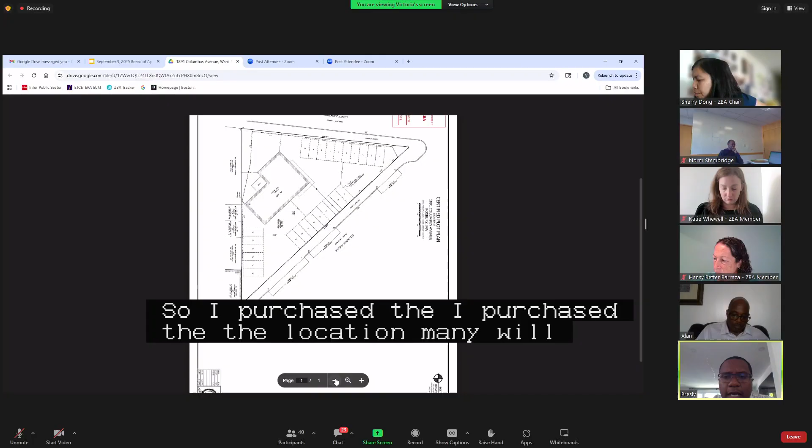Can you go ahead? I'm sorry. I purchased the place in July 2024, and we became operational in April 2025... I own a school bus transportation company, not the yellow school buses, but the small minivans. So I purchased the location mainly with the objective in mind to actually repair and maintain my own vehicles, and also provide additional services for neighborhoods who are looking to have their cars repaired.

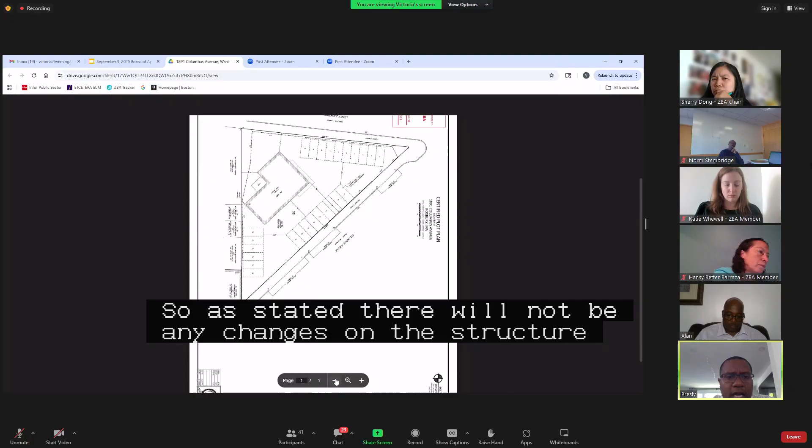Since I'm in the business of cars, we thought about getting a license. I believe there was a license that had been granted already, so we can actually go to auctions, purchase vehicles, and when the vehicles, after 5 years, we don't use them again, we can sell them. So as stated, there will not be any changes on the structure of the building, no additional construction. This will be a very limited 10 to 15 cars parking site that we are looking to have license to sell vehicles and purchase. With that, any questions, I welcome them.

Yeah, so can you confirm, you just mentioned 10 to 15 cars for sale, but you also mentioned mini vans or school buses that are also going to be located on the site. So does the 10 to 15 include those, or how many spaces are utilized for that?

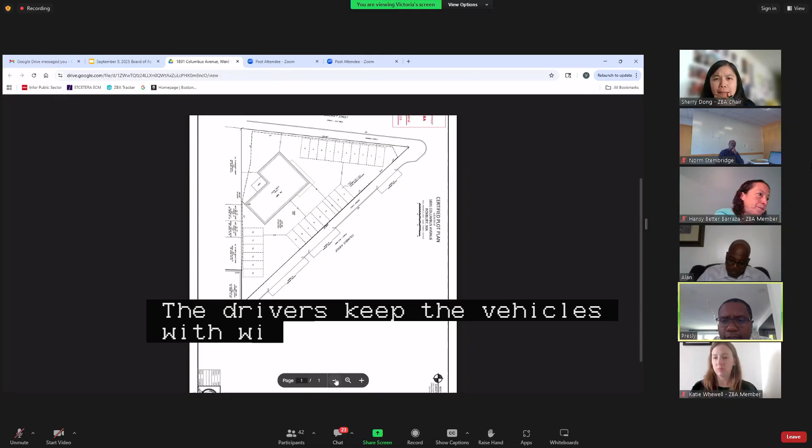The drivers keep the vehicles with them because those are minivans like Toyota Siennas, and some of those drivers have to leave early, so they keep the vehicles with them at all times, even over the summer. So you're not parking them on the site? That's what I heard you saying. Very few that we park on the site.

Okay, and can you just clarify, where do you exit and enter? We exit right in the front here, as you can see, to the bottom right hand corner. That's where we will actually exit, and there is an additional gate there, but we have not used the gate because the city has just put the bus stop there, so it makes it very tight. So we enter and exit right at the very bottom where the cart is.

Other questions from the board? Yeah, the applicant mentioned 10 to 15 vehicles, but in your site plan, you have 20 spaces. To be honest with you, when it was given, I had asked for about 15 vehicles, but they showed 20. If we get 20, great.

15, that's totally fine. And is your current, so what's your current use right now? Right now, we use the shop to repair and maintain our own fleet, and there has been customers walking in where we provide car repair services for them as well. I guess what I'm asking is, what's your current zoning use? I'm trying to see if I can look it up. I'm not sure. You're asking for a variance for forbidden outdoor sales of new and used motor vehicles. What's your current use right now? And maybe Hampton can support answering this.

We could do October 7th or October 28th. I think we'll take the 28th because we're trying to also rectify a small issue in the refusal letter. There was a side yard setback violation that was missing, so we're going to have to try to have that added back in. I believe this will have to be re-advertised as well. So the 28th will work, please.

May I have a motion? Motion to defer till October the 28th. Is there a second? Second. Mr. Stembridge? Yes. Ms. Whewell? Yes. Mr. Langham? Yes. Ms. Better Barraza? Yes. Chair votes yes, motion carries. Thank you.

Are there any more requests for withdrawals or deferrals from 11 o'clock? Hearing none, move on to case BOA 171-8302 with the address of 164 Dorchester Street.

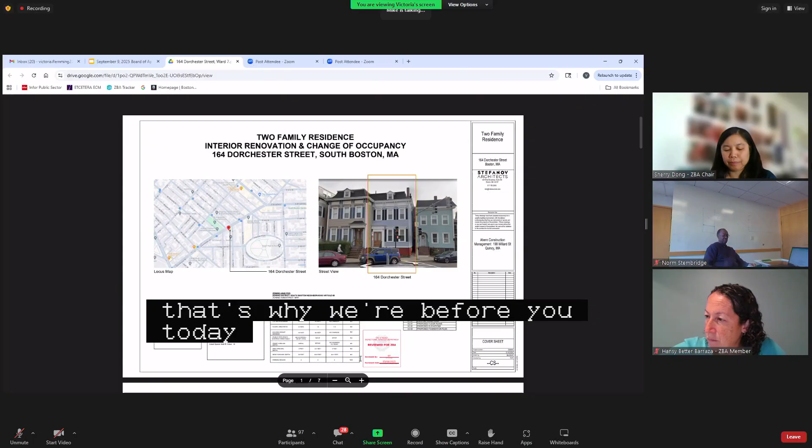And what we'd like to do is legalize it as a 2-family, and that's why we're before you today. We don't really have too many issues other than the parking issue ratio. We are surrounded by multi-families in this project.

And I believe that unfortunately, I can't scroll through everything. I had to close my other window to get this open, sorry. You bear with me for one minute. Sir? Yes, sorry, I'm trying to open the other window because it locked me out when I had to click over the panelists.

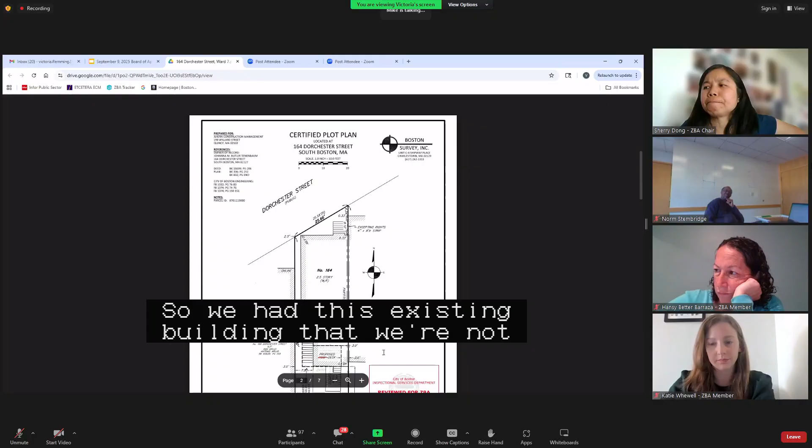So we have this existing building that we're not increasing the square footage of. We believe we're making it safer than it was for egress because it had two treacherous rear staircases that were very narrow and very steep, and now we're making them more compliant for egress. So we had an 8-bedroom single family, and now we're going to have an 8-bedroom 2-family, which is what we're proposing.

And again, we have to get relief from the parking situation. FAR wise, we meet the lot size required for 2-family, other than the new zoning — not from when this property was built, but original zoning allowed for the 2-family. The new zoning requires an additional, I think it's 480 square feet, for the additional unit. Can I answer any questions about the plans? Are there questions from the board?

Hearing none, may I have public testimony? Madam Chair and board members, Siggy Johnson with the Mayor's Office of Neighborhood Services. This petitioner completed the ONS community process. Our office hosted an abutters meeting on June 26th, at which no concerns were raised. The Dorchester Heights Neighborhood Association is aware of the proposal and chose to take no position. With that background, our office defers judgment to the board. Thank you.

Okay, we have somebody from Ed Flynn's office. Hi, thank you, this is Sydney from Councillor Flynn's office. Councillor Flynn would like to go on record in support. Thank you. Without, there are no additional comments.

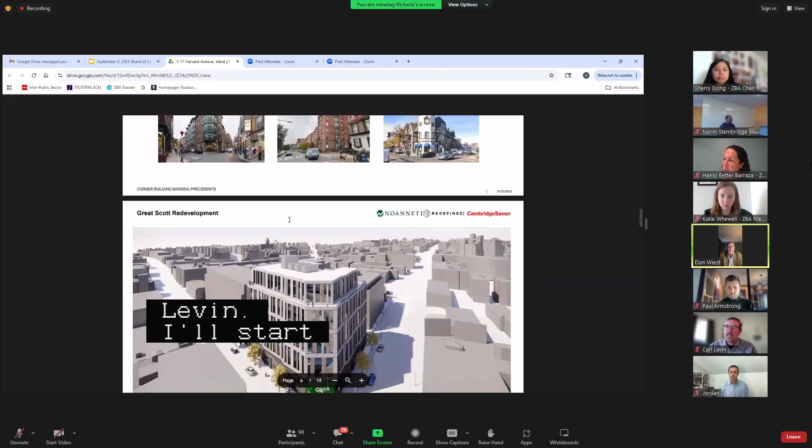I'm going to give you a brief procedural overview on the project and then pass the presentation over to Carl Lavin. I'll start by explaining for context. If we could just move back to the first picture, I'll let my co-presenter go through the slideshow.

Thank you very much. So for context, this is a project that's been five years in the making. The goal has been to bring back the legendary Great Scott music performance space. Spaces like this have been closing around the city and across the country. This one shut down during COVID, and it's now coming back.

This project is a mixed-use one. It will have two performance spaces on the ground floor: the 300-seat Great Scott, and a smaller 75-seat O'Brien's Pub live entertainment venue. There'll be food and beverage, maybe some retail on the ground floor. And then, to spread the costs and make this a financially viable project, there'll be 139 small, compact, efficient residential units above. The project was approved by the BPDA board on April 10th of this year.

It had overwhelming community support. We received approximately 358 support letters versus 5 in opposition. Since that time, by our count, we've got in 1,584 support letters for this project as it's headed into today's hearing. With that said, let me pass the presentation over to Carl Lavin.

Hi, thanks for having us today. I'm Carl Lavin, and I've been involved with Great Scott since 2003, starting it as a first weekly and eventually talking the owner into becoming a full-time venue in 2004. Soon the venue became more than a bar with a stage. It evolved into one of the most respected live venues in North America, and numerous bands that have played stadiums, festivals, and arenas have played at Great Scott along the way.

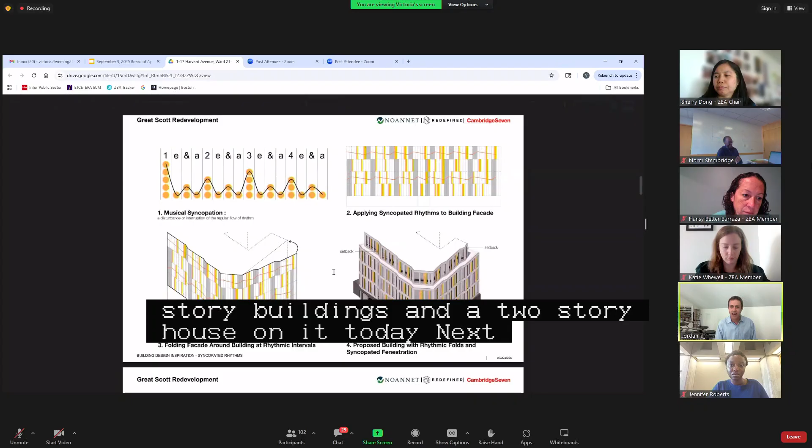We could go into this for an hour if people were interested. We know you don't have that, but our architects - one thing we will not do is put up a building that looks like every other building in Boston. We're working with an architect, CambridgeSeven, who really is great at making unique looking buildings.

And they designed the rhythm of the windows and the paneling in the building to align with syncopation. I don't know if people are familiar with it, but it's sort of a drumming pattern where you get an unexpected beat in the middle of a regular 4/4 kind of beat. So you see at the top how the beat sort of varies throughout that pattern. I won't bore you with the whole story, but that's how the building rhythm was designed.

These are some inspiration images. We are at a prominent corner when you come off the pike from either direction and you come down Cambridge Street into Allston, you cross over the pike, and then you come to this corner. In talking with the planners at the planning department, they encouraged us to create a signature taller building at the corner than the buildings surrounding it, like these other City of Boston precedent images.

Also, what building taller enabled us to do is to pull the building back from the adjacent properties. We've got an already existing new building on the Cambridge Street side of our property and a soon to be built new building on the Harvard Ave side. So we pulled back from those buildings with a little courtyard on the west by having the extra height to avoid having to completely fill the block.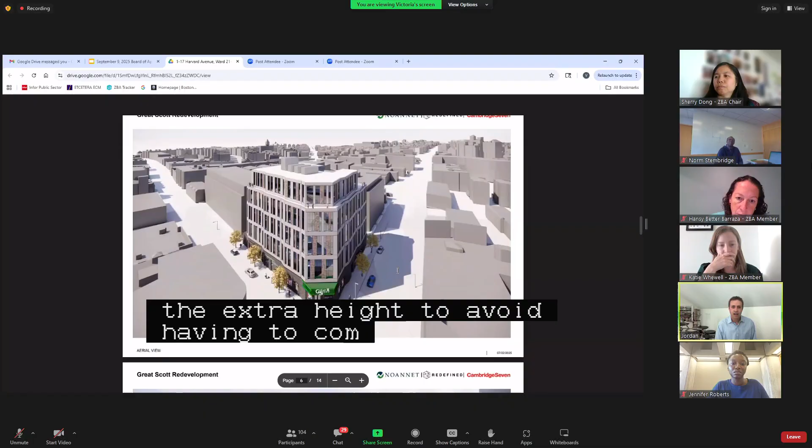Here is an aerial view of the building with the existing building on Cambridge Street and future building on Harvard Ave shown in gray next to it.

Another view from ground level. You will note, for those of you that remember the iconic green awning that Great Scott had at the corner of Harvard and Comm Ave, we're bringing it back, but in a more modern way. The green awning sort of is Great Scott. The Great Scott merch is green. People remember it as green, so we brought it back.

We also, one fun thing that we're doing is at the Great Scott entry, we're going to have a public art competition and invite local artists to submit proposals for the art that will be painted onto the walls of the buildings surrounding the entry. Next slide - view looking up Harvard Ave.

View looking down Cambridge Street. And that's the new entrance of O'Brien's, by the way, on that side of the street. And by the way, all the posters you've seen on these slides are artists that played at Great Scott and then went on to bigger and better things.

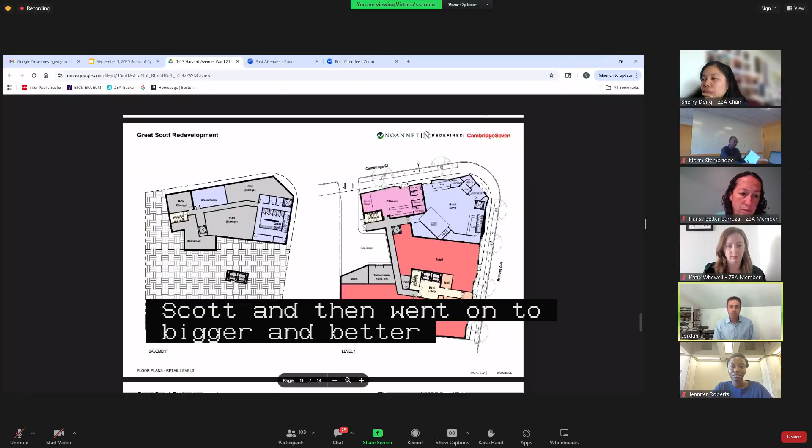Next slide. The layout, I won't spend much time on it, but during Q&A we can go through it. You'll notice we do not have an underground garage, both in an effort to make this financially feasible, so that unlike the thousands of units in Boston that aren't getting built, we can actually afford to build it. Great transit location. We've got the Green Line, the commuter rail, buses, and we think it's a great time to do this type of project.

Great Scott at the corner, you see in blue, O'Brien's in pink at the top, and retail spaces in the residential entry to the south. Next slide.

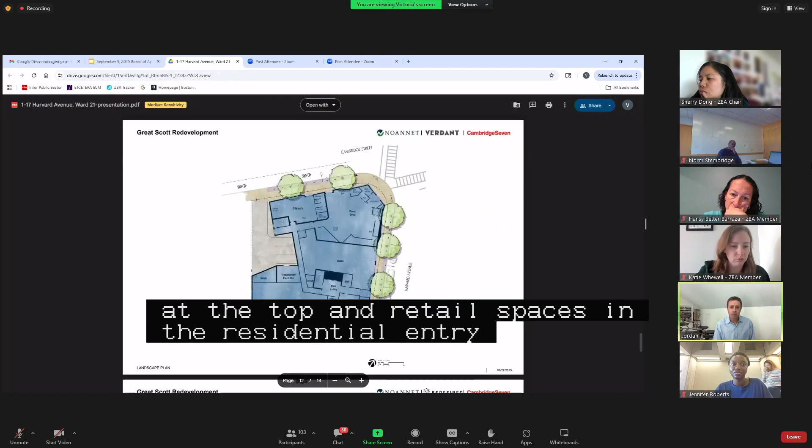This is just showing some new landscaping we're going to be adding on the site. Next slide.

Showing the layout of the building upstairs. You see how, as mentioned, we pull it back, setting it back from the building next door. We have a courtyard opening up to the building next door, so we're not right on top of it. We step back to the west on the upper floors, and we step back to the south on all floors. Continue. And just to wrap up, the old Great Scott awning and the new Great Scott awning.

Are there questions from the board? Hearing none, I'll open it up to public testimony.

Hi, hello Madam Chair, members of the board. My name is Jennifer Roberts, Allston Brighton Liaison, representing the Mayor's Office of Neighborhood Services. Regarding 1-17 Harvard Ave, our office is in support of this proposal. Great Scott is a famed Allston institution which promotes local bands and up-and-coming music talent. The revival of this venue, in addition to sorely needed new housing stock, will help invigorate the Allston Brighton arts community. A community process was conducted, including 2 impact advisory groups on January 24th and February 10th, and a public meeting on February 24th. The proponents also presented to the Allston Civic Association on March 19th. As previously stated, this project initially received 360 letters of support from the community, but there have been thousands since then. At this time, the Mayor's Office of Neighborhood Services supports this proposal. Thank you for your time and consideration.

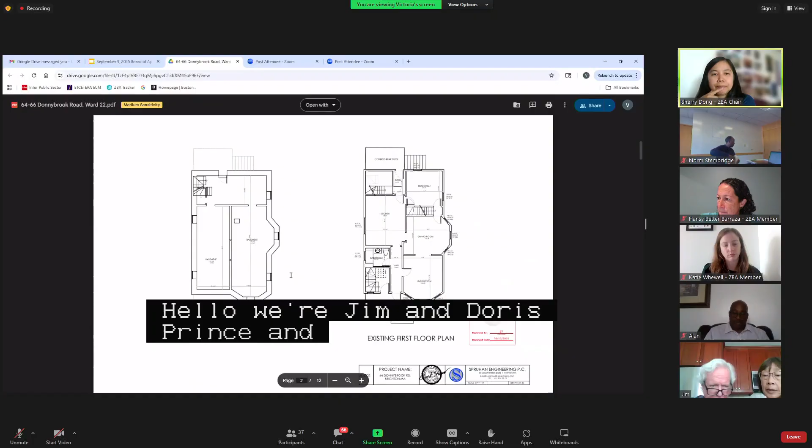Jim and Doris Prince, we live at and own 64-66 Donnybrook. It's a Philadelphia style two-family home that 4 generations of my family have lived in since 1925. Doris and I live upstairs at 64, a 3-bedroom apartment. Our daughter Samantha and her husband Joe rent from us and live downstairs at 66, which is 1 bedroom and also an office for Joe.

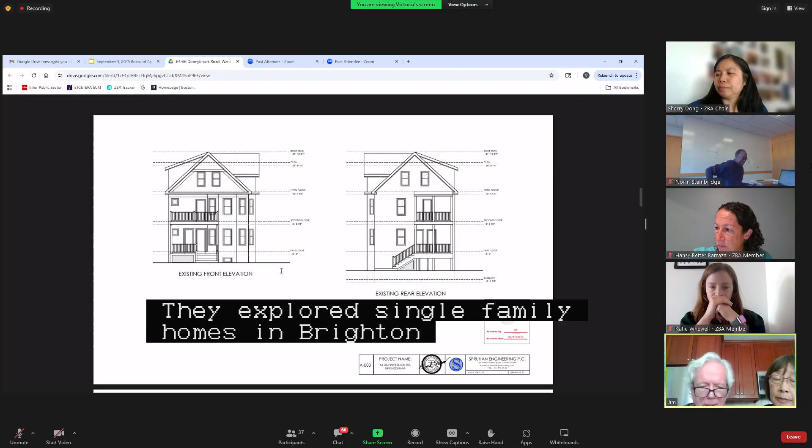Samantha and Joe very much like to continue to live in Boston. They explored single-family homes in Brighton, but they're priced beyond their reach. So our renovation would extend an existing 3rd-story dormer by 18.5 feet.

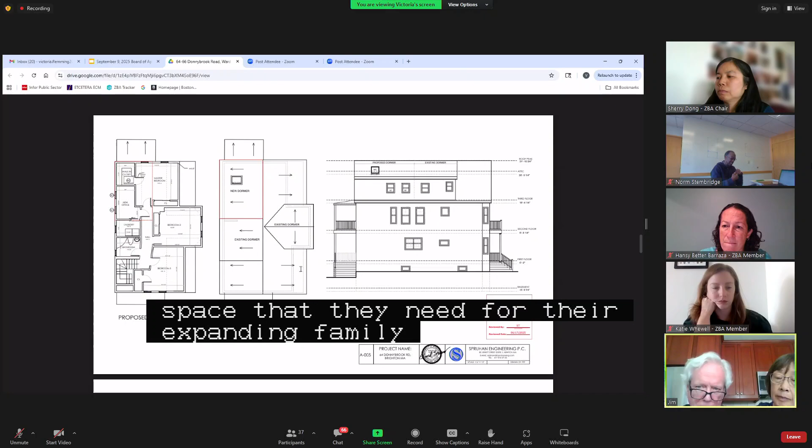That's a good slide, it's labeled existing but it's really the proposed. This existing dormer that's 13 feet would extend by 18.5 feet to the back end of the house. This would allow Samantha and Joe to switch apartments with us, and they'd have additional bedrooms and storage space that they need for their expanding family. Samantha's expecting her first child, as well as the home office that Joe requires for his job.

Doris and I have always planned eventually to move downstairs to the 1st floor, as we're both seniors with increasing mobility issues. If this appeal is granted, Doris and I will sell 50% ownership of the house to Samantha and Joe, maintaining owner occupancy for another generation.

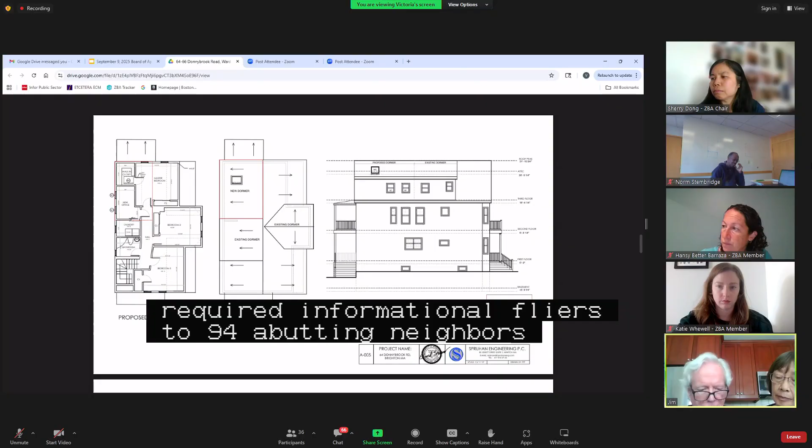In preparation for this appeal hearing, Doris and I posted required informational flyers to 94 abutting neighbors. We had no opposition and got letters of support, which we presented to the Brighton Allston Improvement Association meeting on July 17th, and received their support. So we asked for your consideration of this, and we've submitted 5 letters of support. I'm very willing to answer any questions you might have.

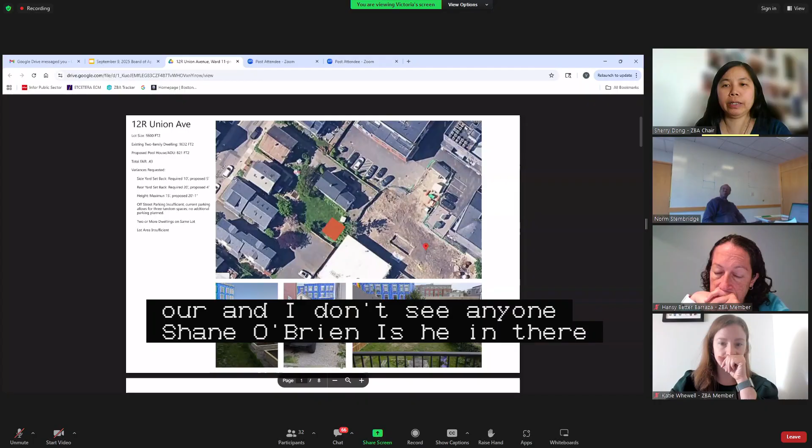So yeah, basically I live in a two-family house that's in the front of the lot, that little square in the front. My partner and I live on the second floor. The first slide's probably the most helpful for the beginning of this. This is a plot plan. I'm proposing to build what I'm calling a pool house, which is essentially an ADU in the rear of my lot. It's about 20 by 20 footprint in the rear of my lot, which I think is pretty modest.

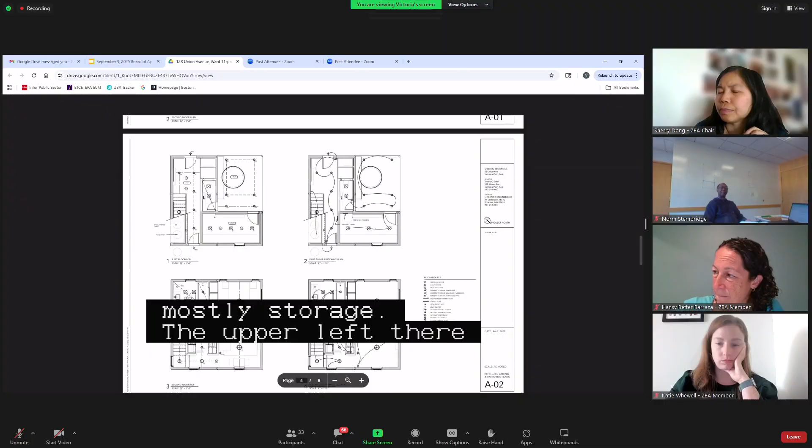It's 2 floors. The first floor is mostly storage. In the upper left there's a storage area, there's an open area. The second floor is a studio apartment, most likely for rent, but it will be connected to my house. I'm not switching to a 3-family or converting to a 3-unit property. This would remain part of my unit as extra space or rental unit.

Variances, so basically I think I have 6 variances, 3 of which I expected. Side yard. Is it possible to go back to the first slide, or is that?

Keep going up, yeah, the very first one. This is the Google image that kind of shows everything, which is helpful. So the side yard, that orange box, is the proposed ADU. It's not 100% to scale, but that's the approximate location and size.

South of that is a parking lot. I am 5 feet away from the fence that separates my lot and my neighbor's lot, which is an 8-car parking lot, so that's one variance. The other variance is rear yard. I am only 4 feet from the rear yard, but the building behind me is right on the property line.

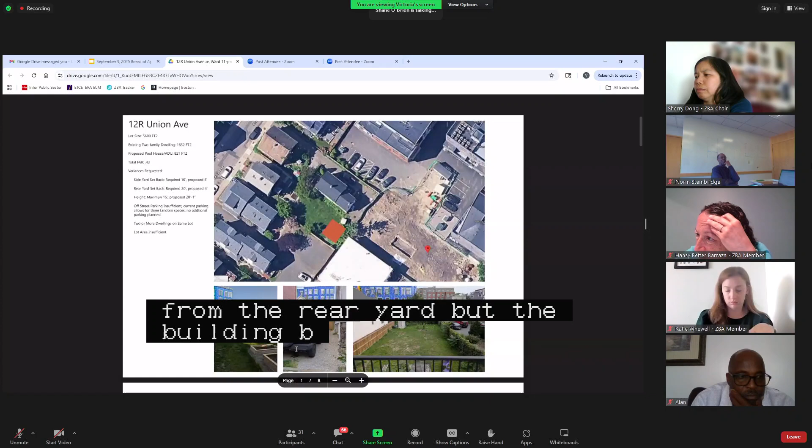That white roof is that building. The lot, which is not developed yet but is in the process of getting developed, will be a 5-story building, 20 feet from the rear lot line.

My other variance was height. My building is 20 feet 1 inch high. The ADU limit is 15 feet, so I'm 5 feet 1 inch over the height.

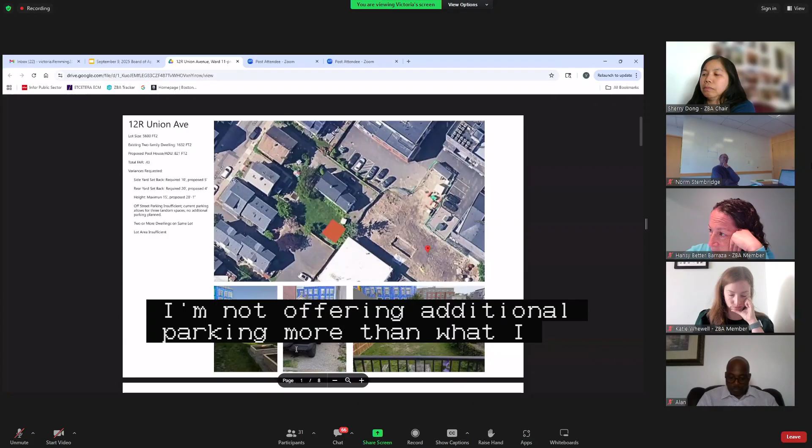The other variances which I learned about last time are insufficient parking. I'm not offering additional parking beyond what I already have, which is a 3-car tandem parking driveway that I share with renters. I just don't have the ability to offer any more parking. There is on-street parking right in front of my house, up and down Union Ave.

The other variance was 2 structures on a lot. My lot's pretty big — I tried to be as modest and responsible as possible about the location and size. It's a 5,000 square foot lot, 5,600 actually, so there's no way to mitigate that, obviously.

And then the lot area is insufficient. My FAR with this new structure is 0.43, which seems responsible and low given the size of my yard, which is one of the biggest in the area. I'm just trying to do something modest to add a little extra space for me. I know the definition of an ADU was questioned last time, and I'm not sure how to answer that, but that's my presentation.

Thank you. Go ahead, Ms. Better Barraza. I just want to thank the applicant for submitting additional material. I know we've heard this case in the past and I was the one asking a lot of questions, but the way you presented your material is very clear.

In the last presentation, I raised the issue of whether this was a 3-family, or really 2 plus ADU, and that there was a zoning violation I believe was missing and not cited — building an additional unit at the rear of a house, which is forbidden per zoning. Now that you have all the variances in place, I do agree with you. It's a reasonable request. So thank you.